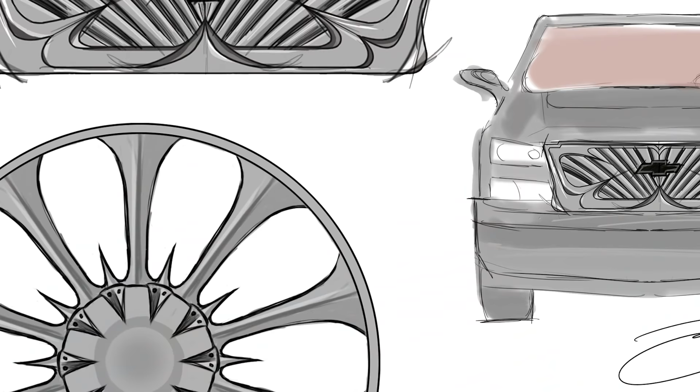This was a custom truck that had a lot of my design influences poured into it. I had an absolute blast working with John Cafaro and his team over at General Motors to get that project done. At the time, it was just 2D sketches that I was contributing to the build. And I always thought, man, it would be really cool to be able to model an entire car or truck and really have ultimate design influence on it.

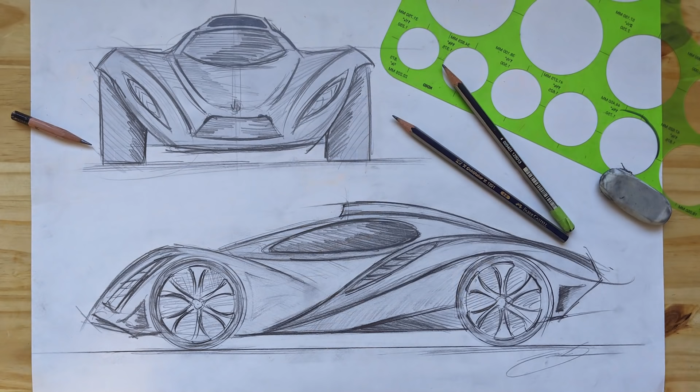Up until recently, I really didn't have access to the software or the proper education to do so. What I found on the platform is that I can model just about anything that I want. And I really wanted to model up this car. Like I said, since I was a kid, I've been drawing cars everywhere, even when I'm not supposed to be drawing them.

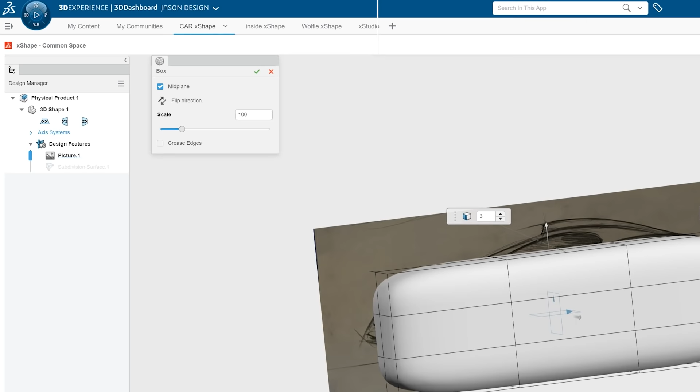So what I did is I started off with a sketch of what I wanted to see in an automobile. I was able to take that sketch, bring it right into xShape, and I started with a box, actually, and just started modeling to my sketch. I was just shocked on how fast I was able to model everything.

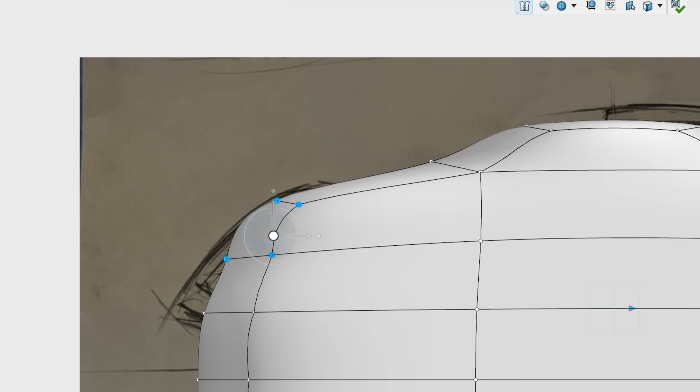Using these subdivisional surfaces, I was able to push and pull my way to victory lane. It was just brilliant to bring in my sketch. I had a front view and a side view and just start modeling. I never thought this would be possible until I was exposed to these tools.

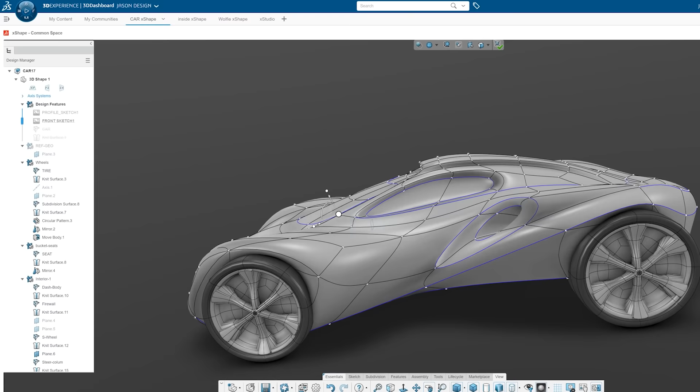A little bit of the workflow that I did was, I did the rough model in xShape, and then I was able to save out that xShape model and open it right up into SolidWorks Connected. I've been using SolidWorks a long time now, so I'm really comfortable with the tools. It just didn't really have anything that was a super organic way to model, kind of like a digital clay. And that's exactly what I got with xShape.

So I went into SolidWorks Connected and just started having fun doing surface lofts and cuts and extrudes and offsetting the surfaces, all the stuff I'm comfortable with in the SolidWorks interface. And I was able to create this car.

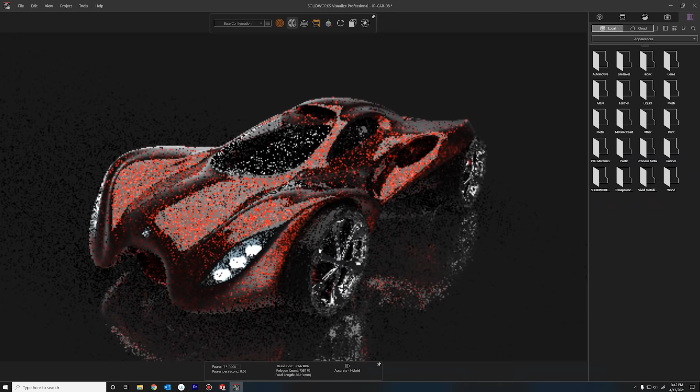From there, I wanted to bring it to life even more, so I went into Visualize Connected. And Visualize is absolutely brilliant. It makes it look like you spent all this time doing this amazing 3D render, but really the shaders are all there for you. So there's no more monkeying around developing shaders from scratch.

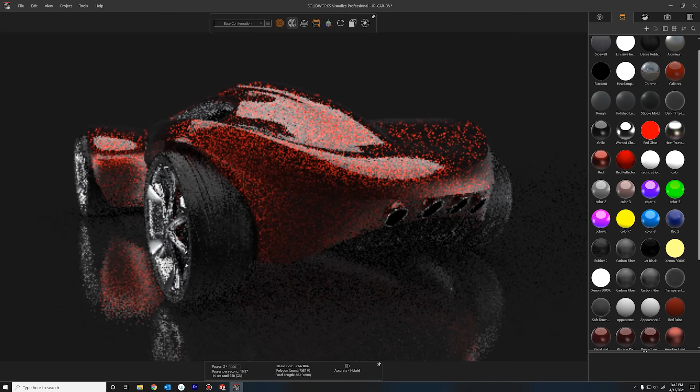There was a nice chrome that I was able to grab. Glass, I was able to bring the glass into it. And you know what? Why just do the exterior of a car when you're having so much fun modeling? Why not just model the entire interior too?

So I did a dash, a center console system, and these really crazy custom bucket seats. I wanted to do something that I haven't actually seen before in different cars, to push the boundaries of what's been done, just a fun concept. So I did the interior of the car as well.

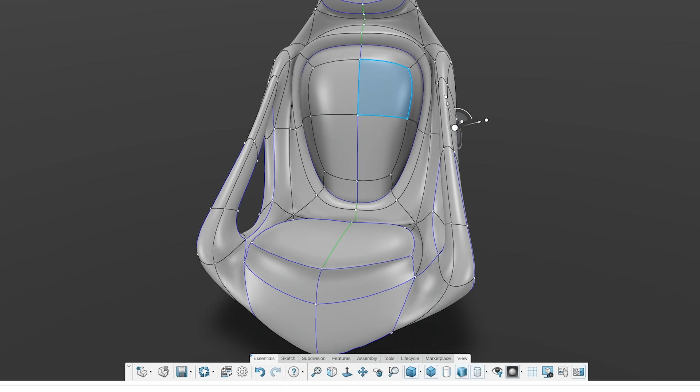Once I was inside Visualize, I was able to do different textures and get the glass and the chrome and everything to really pop. And with Visualize Connected, I can even set up full animations. So now we're not just talking about still renderings, we're talking about fully animated films. I'm able to do these full animations, and it's just an awesome piece of software.

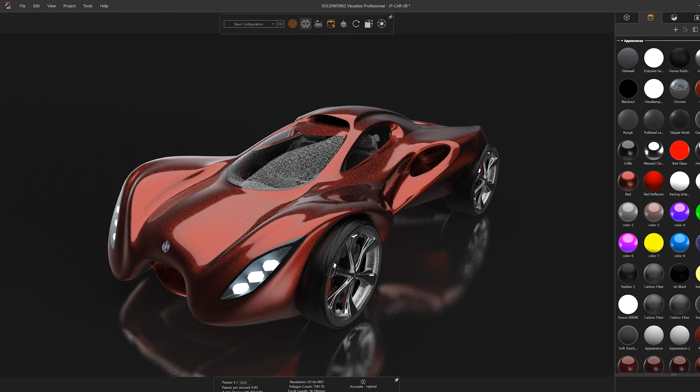So my workflow on this project was all done on the 3D Experience platform. I started off with 3D Sculptor, xShape, and created the model there. Then I opened it up in SolidWorks Connected, was able to add more detail to the project there. And then I opened it up in Visualize Connected and was able to create a full-on movie and awesome renderings right there in the same platform. So it was really cool to bring this to life.

It's something I wanted to do for a really long time, and I'm glad I got a shot to do it. So look out for my next video and see what the next project that I'll be working on is.